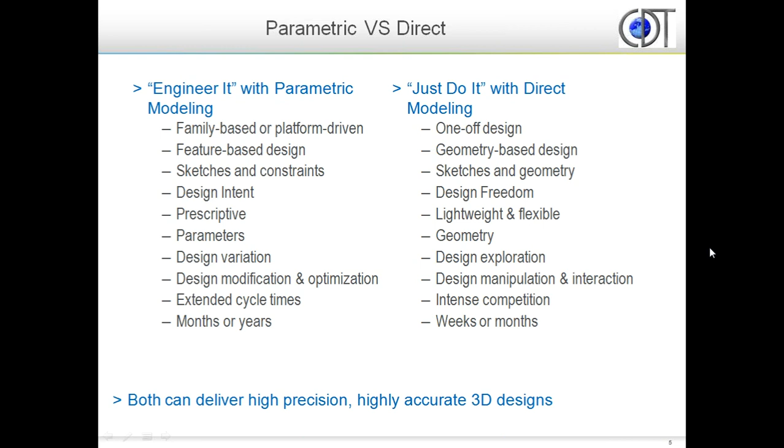Direct modeling process opportunities: even though I can do a lot of the same work I'd do within Pro-E, the idea is I do hardcore engineering work in Pro-E and design work with the Creo Direct application. I can also make late design changes because you're not worried about moving things and what happens down the line - not that you can't make those relationships, but you're usually not as tied into them. This allows on-the-fly design changes, late-stage design changes, and helps with model preparation for FEA work, which you'll see as I get into the demo. There are a lot of different reasons for this, and we'll probably have some Creo Direct demos and webcasts as we go on, but unfortunately we won't get too deep into exactly what the capabilities are today.

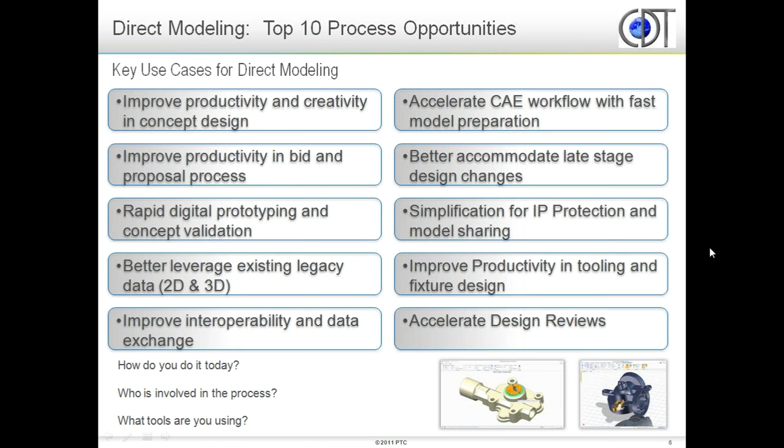Okay, so Creo Flexible Modeling - again, this is a Creo Parametric only app, so if you're using Wildfire 5 and back... and Rosalinda, I forgot, you should have piped up here.

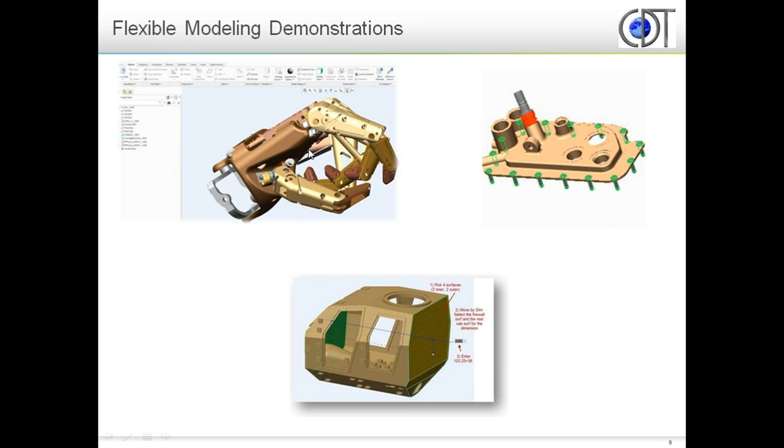Okay, alright, so all I'm going to do here is fire up Creo Parametric. For those of you that have not seen Creo Parametric before, and this is your first introduction to it, you'll have a little crash course into what you are seeing. But essentially, this is the changes that they have made for what would be considered Wildfire, which is now Creo Parametric. You can kind of see this is just the beginning interface as I fire up Creo Parametric.

See what is now called the ribbon interface. Me personally, I think it's kind of nice for those of you that are working on Wildfire 5 and have been introduced to it in the drawing mode.

They have made some changes that allow you to manipulate and create things no matter what tabs you're in, which is nice, and that's kind of a big cheer usually from the Wildfire 5 guys.

But now, here's the new ribbon interface, okay? For those of you that are considering moving up in some form. We all know what happened when we moved from 2001 to the Wildfire series. I will promise you it's not nearly as big a jump as that was.

You can kind of see some of the interface as I open up a part here. This is just a part file that has been opened up. One thing that's nice that they've added into the interface that makes it a little bit easier as far as a transition is this little command right here.

Essentially what they've done, for those of you that haven't seen this before, is they've logically grouped commands into tabs. So you can see all of the geometry and modeling-based functions here in what is called the Model tab. The Analysis tab shows distance and angle measurements. And if we were in assembly, you would see some of the interference checking type functions.

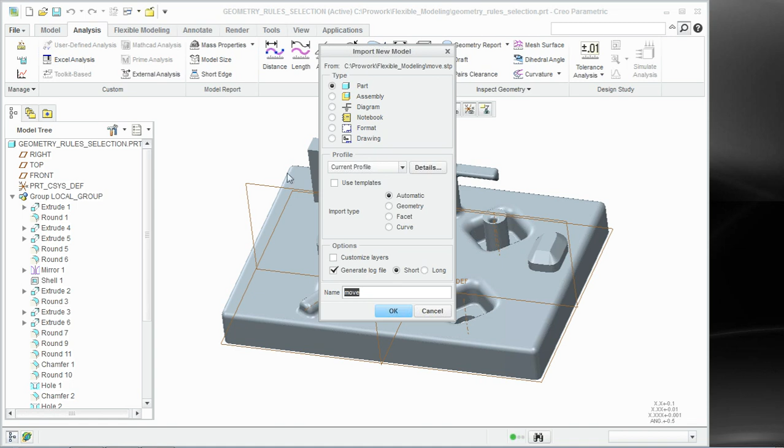Okay, so I'll go ahead and we will also open up this move step file. What you're going to see is we're going to actually open up import geometry. Now it's not the most complicated import geometry that you have, but it is true import geometry. What you will see here is the flexible modeling package is a tab that gets added into the interface of what is Creo Parametric. Okay, and then we'll talk about the capabilities of it.

So what I have here are two different models, and the two different models are this model right here, and then this move model that you see right here. We'll kind of start out with this, the Pro E, which has the history, and then we'll move from there.

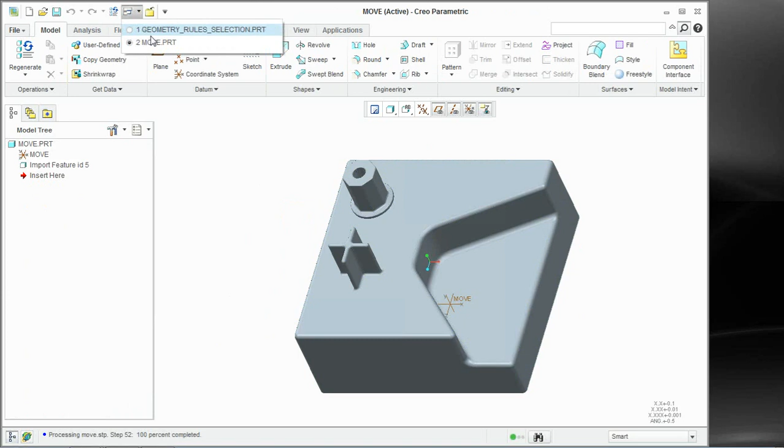One thing I want to talk about here is when you talk about moving geometry in the sense of manipulating, dragging, pushing, and saying I want to move it this far, 5 or 6 inches or whatever it may be, a lot of times what you're dealing with is how do you select that geometry, okay?

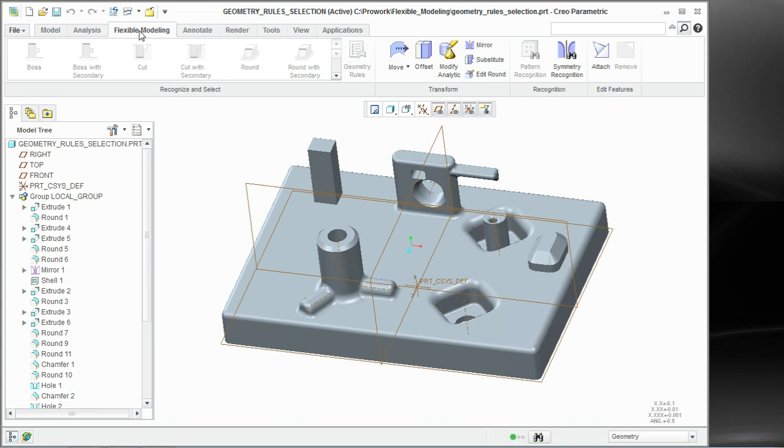So when I pick the flexible modeling tab, you see a number of different commands that it has, and a lot of them are based off of selection. So those of you that have done geometry selection, as far as the surface base, where you use the loop selection technique and the seed and boundary selection technique, the selection techniques in flexible modeling are actually quite intelligent.

So I can pick a surface and say, hey, I want to move this surface, or I can say I want to describe this thing as a boss. And what you'll see is all of the surfaces that are associated with what is considered to be that boss will get selected. Same thing if I pick this surface right here.

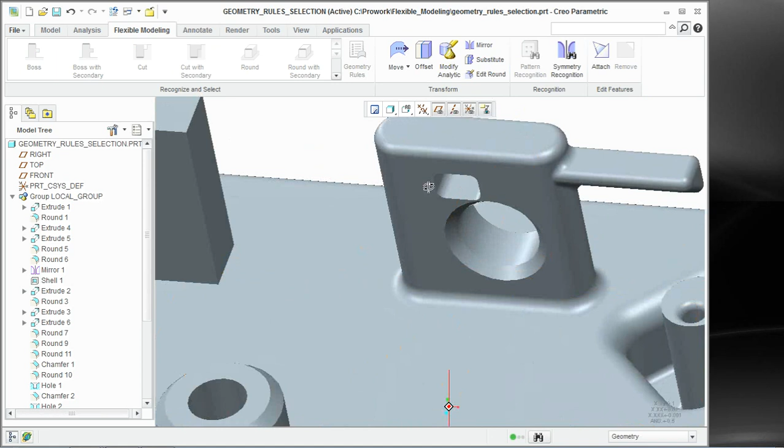If I pick this surface right here, if I say I want the entire boss, notice how some of these other surfaces didn't get selected. But if I say I want this surface and I want boss with all the secondary features or secondary surfaces, it selects the entire thing.

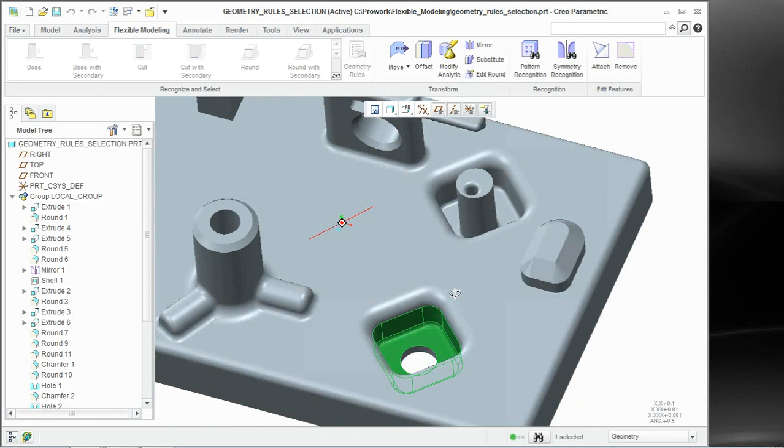And whether it's bosses, what it considers to be bosses, or if I have what it considers to be a cut, I have the ability to select not only those surfaces, but also a number of different surfaces with this secondary concept. So it makes it easy for you when you have the idea that I want to manipulate geometry.

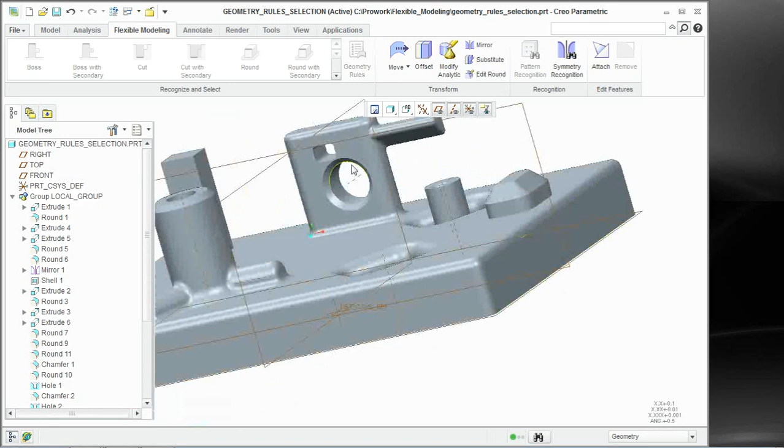Instead of just holding the control button and picking everywhere, or using some of the other techniques that Pro E has, you can use some of the techniques within the flexible modeling package to get the same process done. And it doesn't make a difference whether we're using a Pro E based part or an import geometry based part. I still have the boss with secondary concepts, and again, it makes it easier for me to select and saves me time from using the control button and some of the other functions that I have. Okay, so selection is nice and easy within the software.

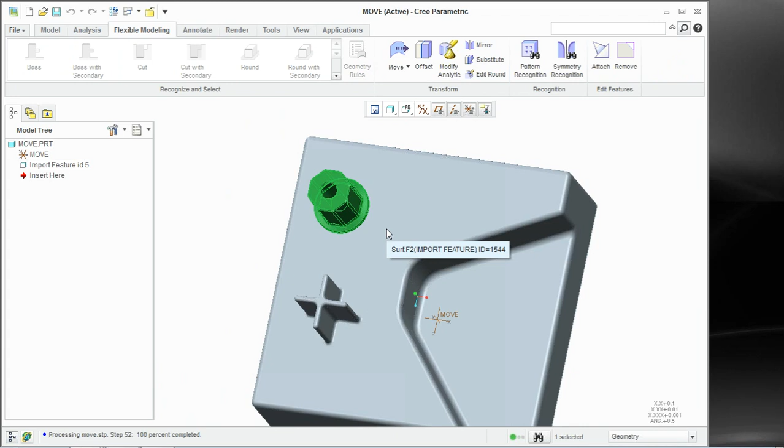All right, manipulating geometry. Again, whether it's on the import idea or whether it is on the Pro E idea, and we'll do it on both, what I have is something called the move command, and the move command is sectioned out into move by dimensions, move by constraints, and move using the dragging technique, and I'll show all of these.

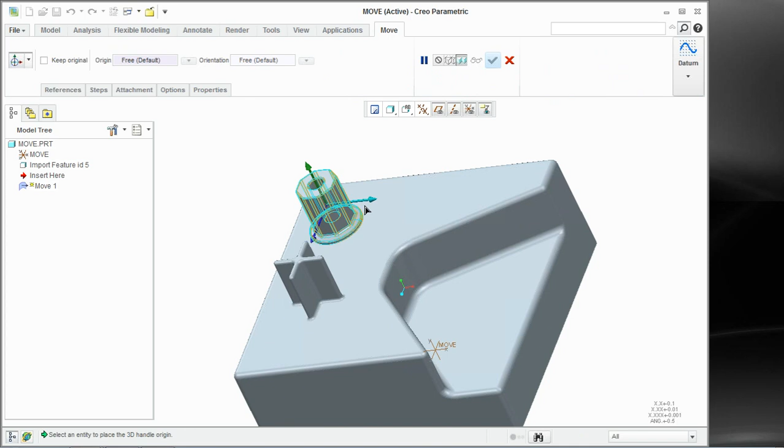But if I say move using the dragging technique, what you'll see is the 3D dragger, which is prominent actually in Creo Parametric in the assembly mode, and what I'm allowed to do is drag geometry, and all I'm doing is dragging it along, essentially, in this case, X, Y, and Z.

So I can drag it up. Notice how when I drag this guy up, the actual geometry manipulates to keep the solid concept and changes itself to adapt to what we're doing. So we'll drag it back down. There it is. Okay, when I'm done, let's go ahead and drag it back up a little bit there.

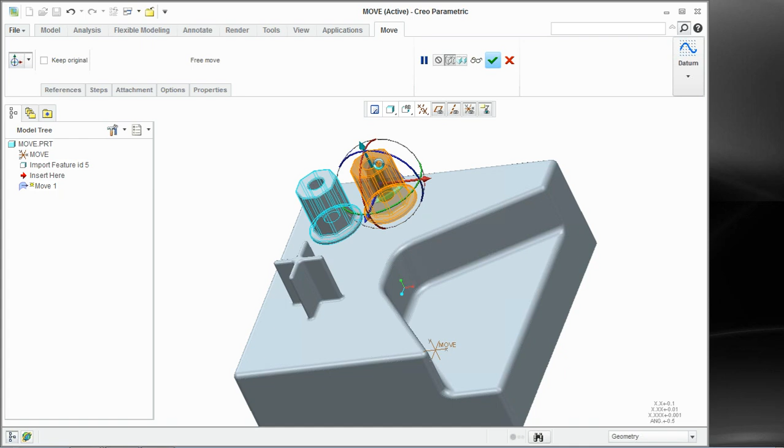When I'm done, I say here's the OK button. And what I've done is actually drag import geometry. Again, manipulating import geometry.

If I come do it here in the Pro E parts, it's the same concept. If I come in and pick this surface and say I want the boss with everything secondary, do a move right here, again, what I'm doing is actually manipulating Pro E data, but in the sense of a geometry manipulation.

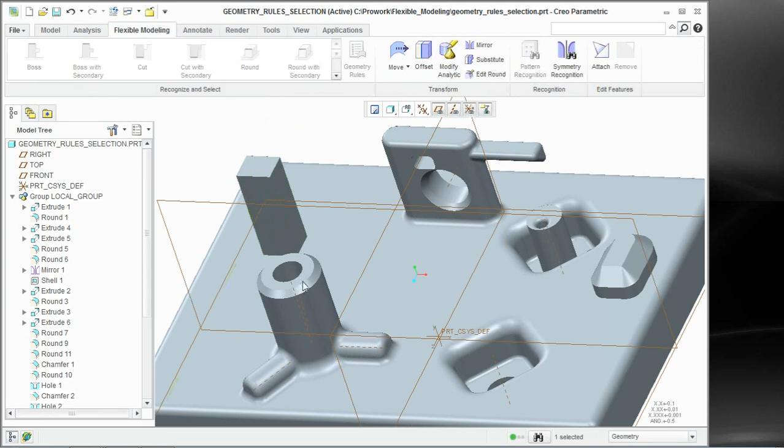So again, the idea here, everyone, is that if I have this set of features right here, and at the last minute my customer comes up and says, hey Ben, we want to move this thing 10 inches one way, but for whatever reason I've built a lot of parametrics and relationships into that, the effects of that could be fairly devastating on my model and the manipulation of my model.

What I can do with the flexible modeling packages is not only do this with import geometry, but I can perform these same functions on Pro E data as well. What you see here at the bottom, if I drag this down, is that they go in as move type features. I can come here and pick this move, and if I delete this move feature, whatever I just did goes away.

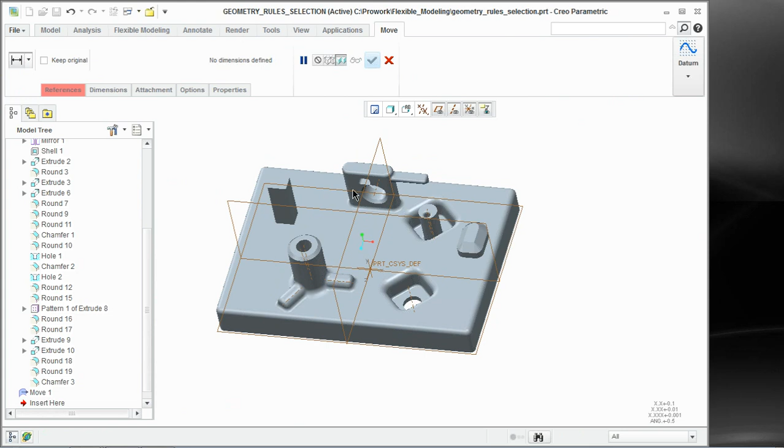So whether I'm doing moves on features like this, or something called move by dimensions, I'll pick this guy right here. Actually, let's select him first. Let's select everything, and say boss with secondary, move by dimension. I'm going to say from here to here is how I want to regulate my dimension.

Instead of me just manually dragging things around and not knowing where the dimensions are going to be, I can say here, that's how I want to regulate, how I'm going to measure it. I want to move it from that, and I want the dimension to be close to 100 or whatever it may be. Now I have a little bit better sense of exactly where that part may be.

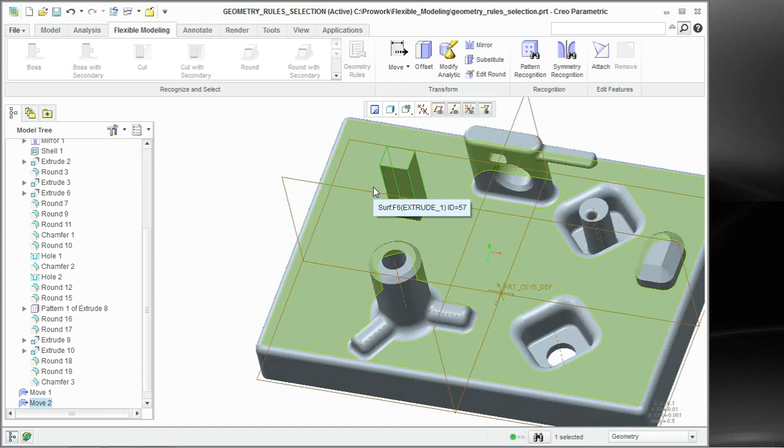So whether I'm moving one direction, you can move a second direction if you want to. You can move in two different directions if you'd like. And something that's kind of nice, and I think it's kind of slick, is the other type of move you have: the move with constraints.

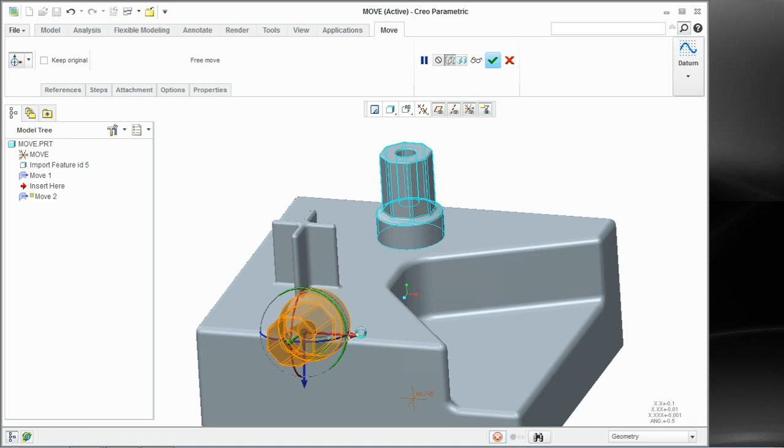Now the idea here, and let's back up so everybody understands what I'm trying to do, is that I can say move with dragger, and I'm going to drag this guy over, somewhere over here, and then kind of turn them around, turn them this way. But really what I have here is no sense of where this thing is at, right?

No idea of where this is at. There's no dimensions that kind of regulate this. Even though I place it now, I can kind of drag it back, but it's kind of off as far as angle-wise. I've manipulated it onto an entirely different surface, but again, there's no real regulation behind it.

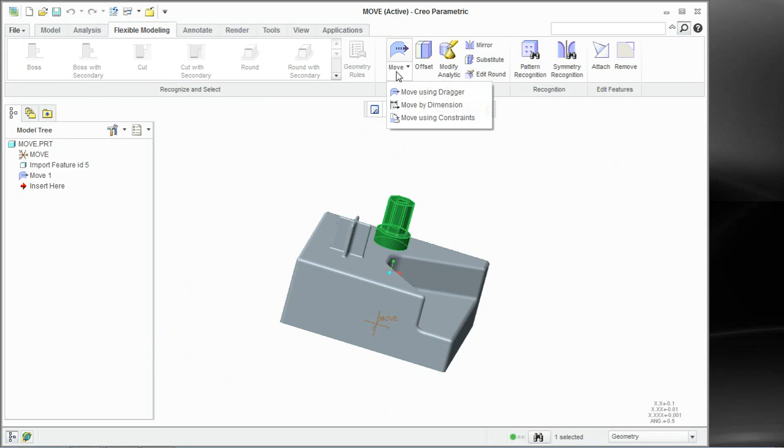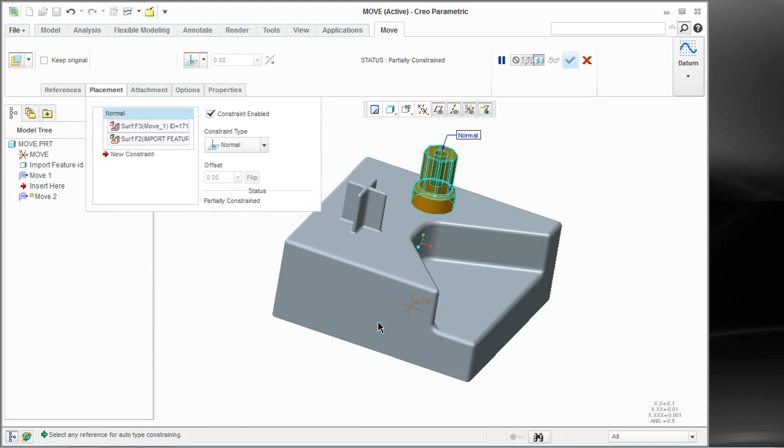What I can do here is actually move this thing by something called constraints, and it sounds fairly familiar to assembly, because that's really what it is. So what I'm going to say here is, there's no flat surface here. I would pick this if this was a flat surface, but I want this - oops, wrong one, not that one - I want this flat surface right here.

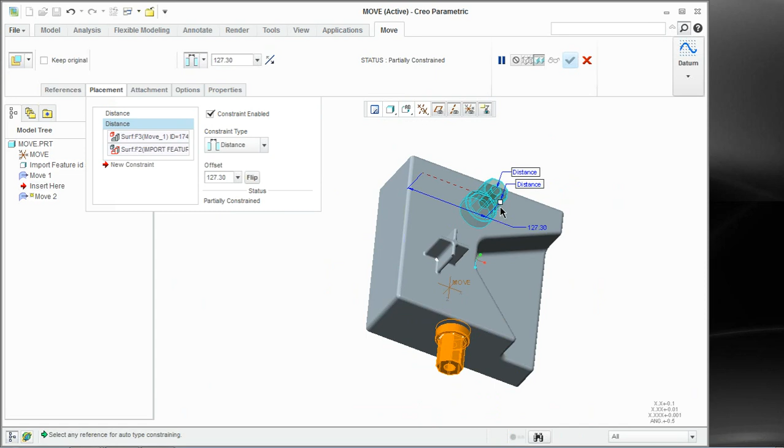And that flat surface right there will make it into a distance. There it is. So from here now, what I can do is regulate distance and how far that guy's sticking out. I'll say I now want to regulate it from that surface to that surface right there. I can now regulate it this way and kind of drag it back and forth, and you can see how we're measuring this way.

And in the last one, I want to measure from here, and I want that measurement to be based off of the bottom. There it is, and I want it to be a distance measurement, and now I can also regulate it off the bottom. So again, now what I'm doing is manipulating it as a distance like that, a distance right here, in and out this way, and then also a distance right there.

So again, even though we are dragging and manipulating geometry, whether it's in the Pro E sense or in the sense of IGES data, I can regulate placement of where that object may be at. And again, I'm not really worried about what the parametrics are at any given time.

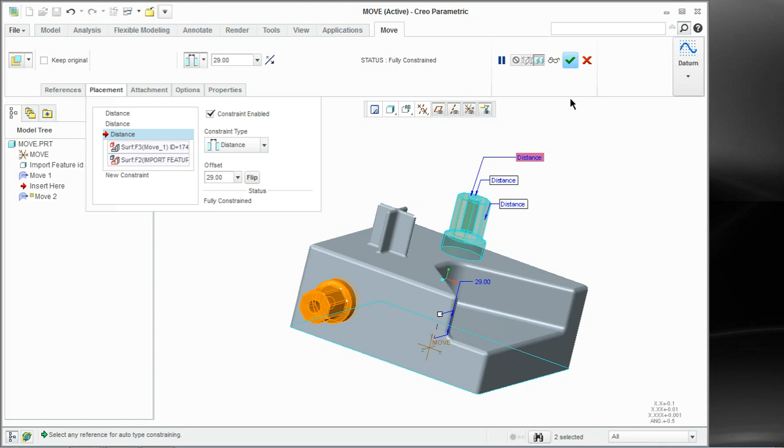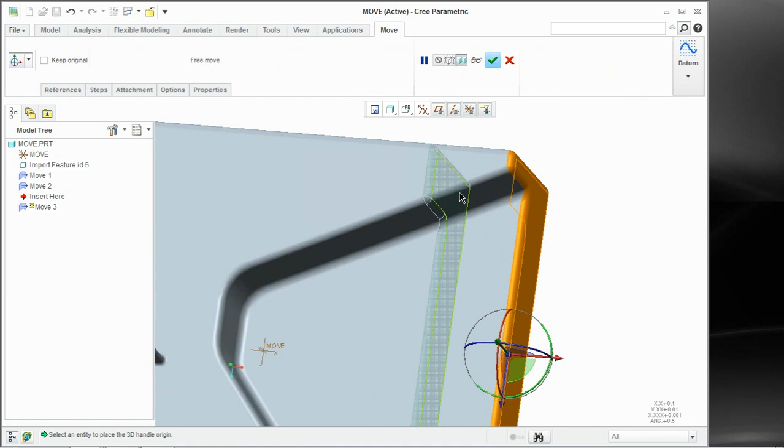All right, some other things that you can do, whether it's features or actual walls. I can come in and say here's the surface that I want to move. I drag it out, and notice how the geometry manipulates accordingly, right? It's not just dragging out straight from here, it actually manipulates accordingly. It's very nice. You can see that type of move right here. Leave that guy right there.

I can come back into the geometry selections. Notice how I can come in and pick this wall right here. If I do a direct move with the dragger, notice how I actually expand that thickness. Well, that's not really what we want.

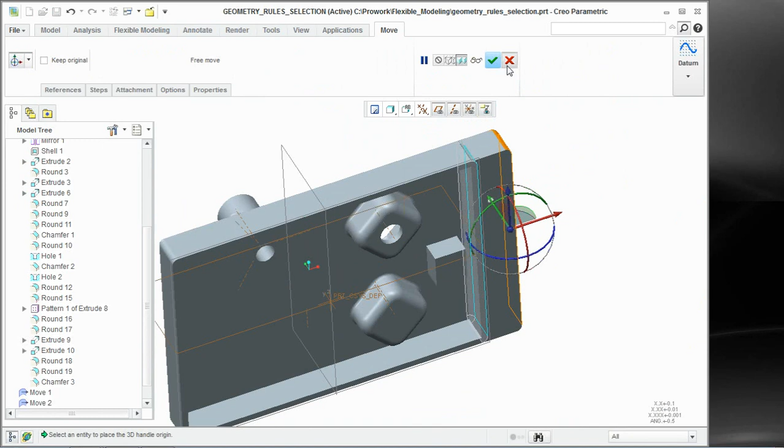We actually want to move the entire wall. I can select that wall and that wall also, and then do a move from that point. Notice how I can say, actually, I want the 3D dragger to move along that edge. I move the wall out now, and I've actually manipulated where that wall is by moving those. Again, I could select all of these features right along with it and move those features right along with it if I wanted to. Let's do an undo and see that move that real quick.

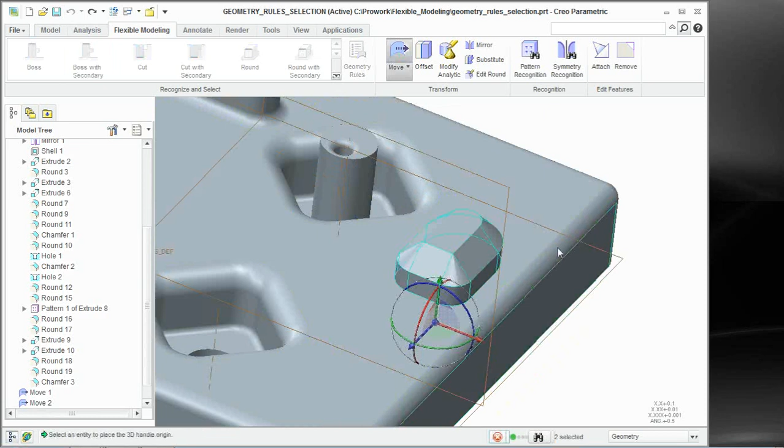There's that surface. Let me go ahead and hold the control button and say boss with secondary. Do a move, move the 3D dragger right there. Notice how everything stays right in relationship to that wall manipulation also.

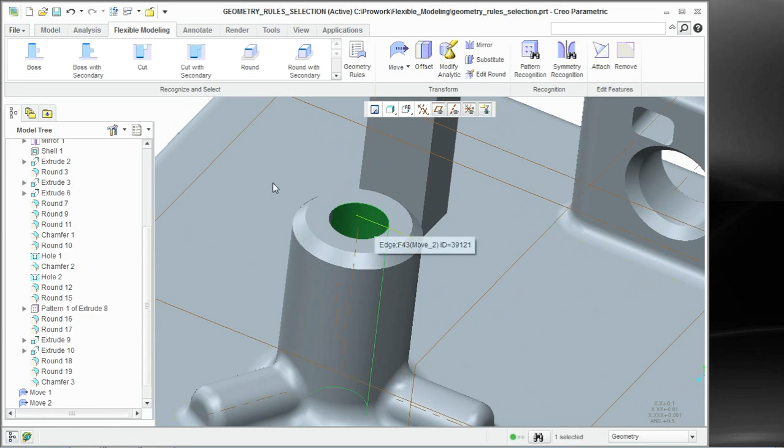Okay, and again, whether it's cuts that I'm moving, whether it's walls that I'm moving, still have all those same capabilities. Come in here and pick the hole that I have, or essentially the cut in this manner. I can do a direct move if I wanted to. I also can say offset, and I can manipulate the size of this hole.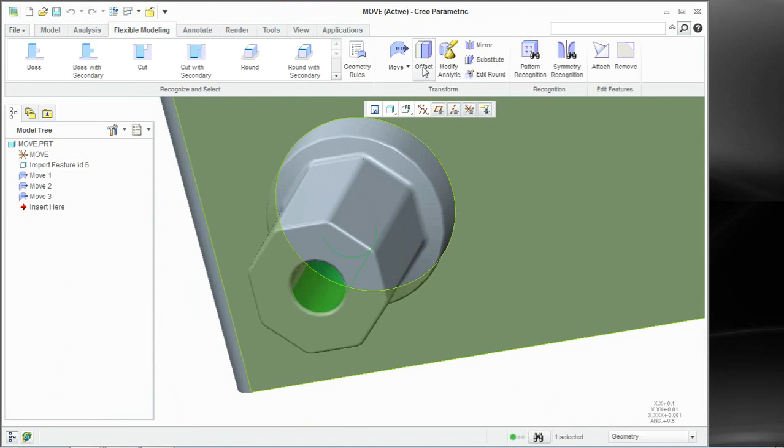Okay, manipulating the size of the hole. We want that hole to be that size. Again, I'm manipulating direct ProE geometry, or if I come back into the move part, manipulating import geometry, notice how the rounds adapt right along with it. Okay, the rounds adapt right along with it. And again, I've made a quick change in IGES data if a customer would ask me to.

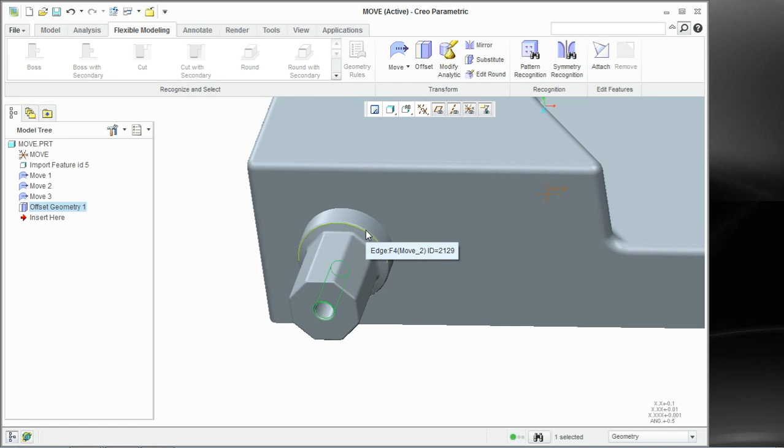So there are a lot of the move type functions that are in the software, a lot of different variations that you have the ability to do with it. Some of the other things that you can do here, and we'll go through some of these other guys.

One of them is the edit of rounds. It will recognize, again, we are on the import data. Notice how I can select a round and say, hey, I just want this round. Or if I say I want this round and I want round with secondary, I can do an edit round. Notice how I can manipulate all of those rounds at once. And then, again, what are we manipulating? We're actually manipulating import geometry.

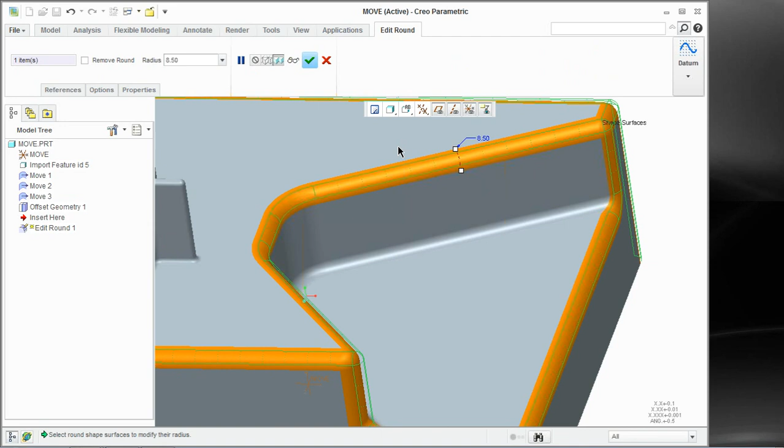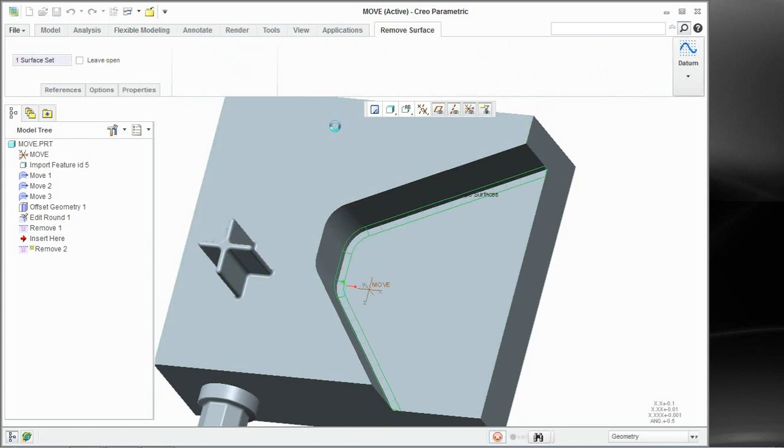I also have the ability to take these rounds and then do a remove command. So again, if you're doing FEA work on import type geometry, it's a good way to modify that geometry. Again, I can pick these guys, round secondary, and do a remove also, taking out all the rounds on import data, and this is very similar to the remove tool that you see within ProE. So again, whether it's here or whether it's on the geometry tools, doesn't make a difference, still do the exact same type of function.

There it is, round with secondary, and then I can edit the round if I want to. Again, editing the round of ProE data, and what do you see here at the bottom of the model tree? An edit of the round.

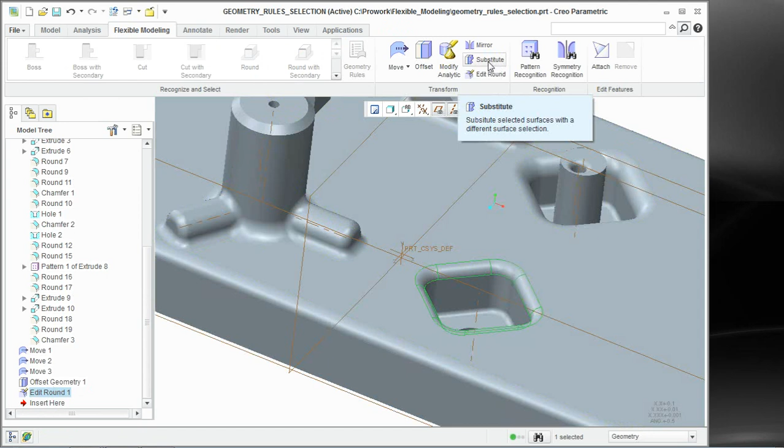All right, so the remove command, the edit round command, there's one more thing that I'd like to show you, the substitute. I'll open up a little different file for that. Here's my substitute function. For those of you that have ever used the offset and replace command in the surfacing tool, this is kind of an extension of that. This is actually a little bit slicker than what that one is.

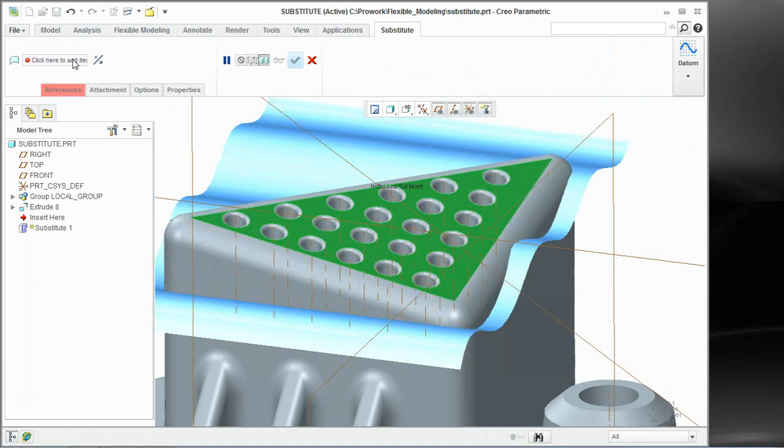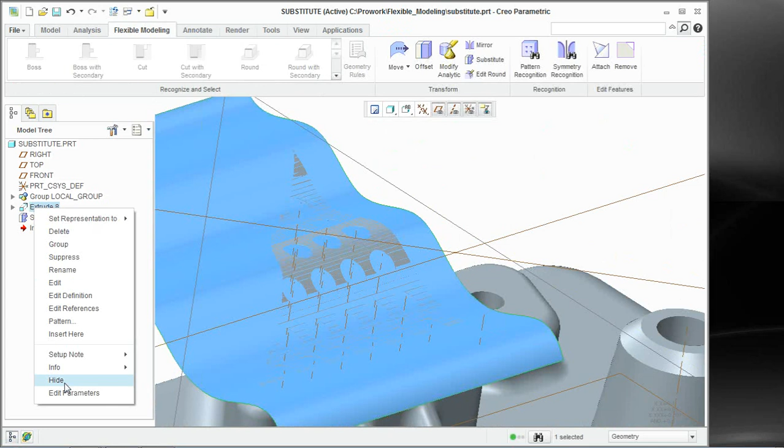But what I can do is say substitute, and I want to substitute that surface, and what I want to substitute it with is that surface. And what's really nice about this is the ability for the software to keep the rounds, and not only the rounds, but also the holes and the geometry that was associated with those holes, or in a sense, the rounds that are on those holes. So if you wanted to create another wavy type surface just to see what it would look like, or do a quick prototype, again, this is ProE geometry that I'm manipulating and doing a substitute with.

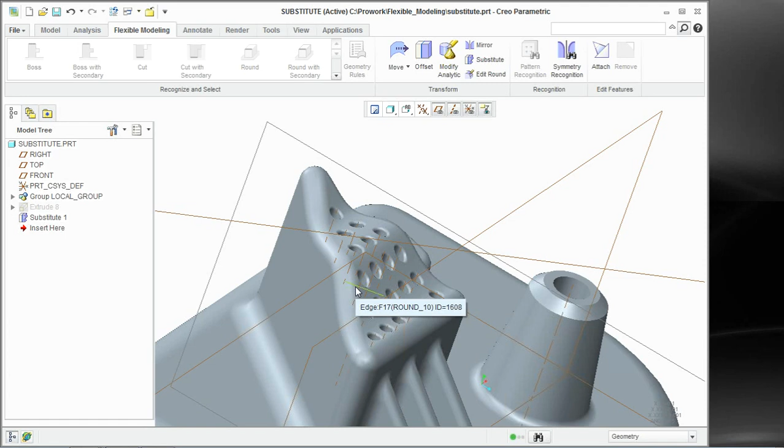That replace command is within the Pro E interface if you've never used it, but this one's a little nicer and it does more work for you, where I wouldn't have to recreate all the rounds on the holes. All of this work has been done for you, and I've replaced that surface right here with this surface as soon as it regenerates with that object. Kind of a nice feature that we have with that.

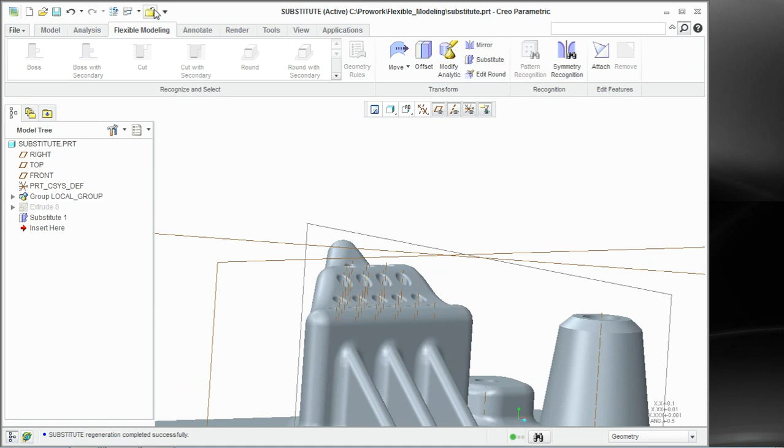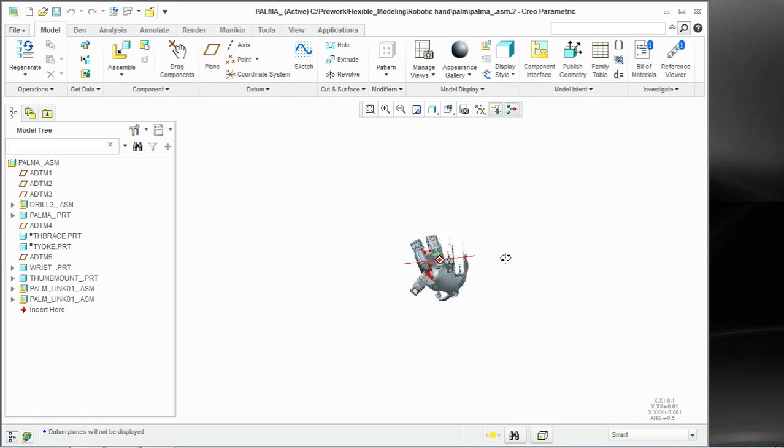Last thing I wanted to show you, again a very simple interface with very simple commands, is this. Let's close a few of these down and open up this little robotic hand that I have. Just turn off the bird's nests. There we are. I'm going to open up this little finger that we have.

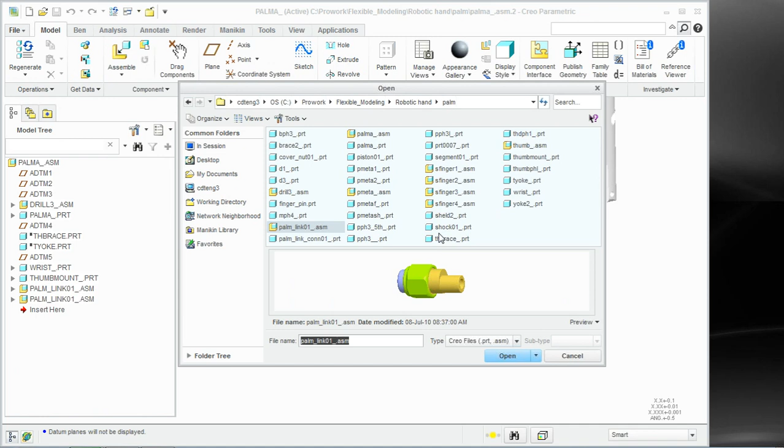Notice how this is a Pro E part that I have right here. Let's go back to the assembly, and what I'm going to do is assemble a little pin into that finger hole that we have. As soon as I find it here, there it is, finger pin. Let's drag it into an area right about there.

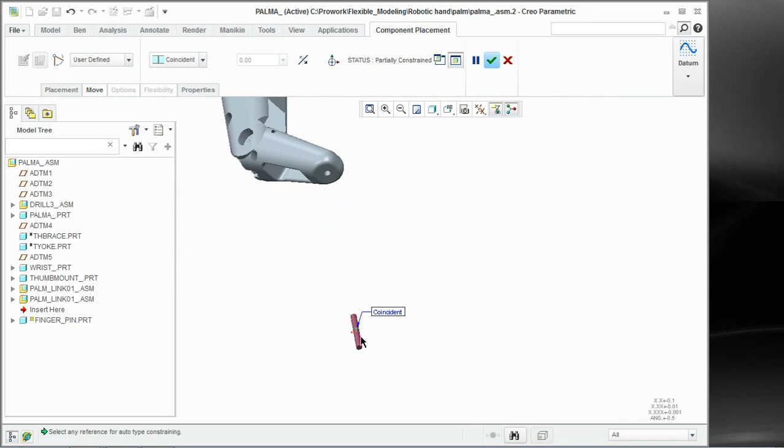Let's turn the 3D dragger off, and I'm going to place it in this hole. Notice how all we did was just put a pin in the little finger hole.

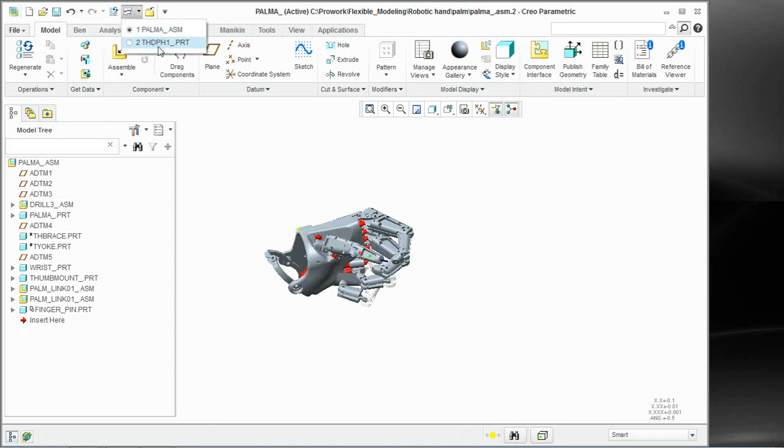But what I'm going to do is come back to that specific part, and in the flexible modeling function, go ahead and pick that hole and do a move for it. We'll do it with the dragger, and what I'm going to do here is just drag that hole that way. There it is—notice it's a little offset, and all it does is put a feature in the model tree. That is the move command.

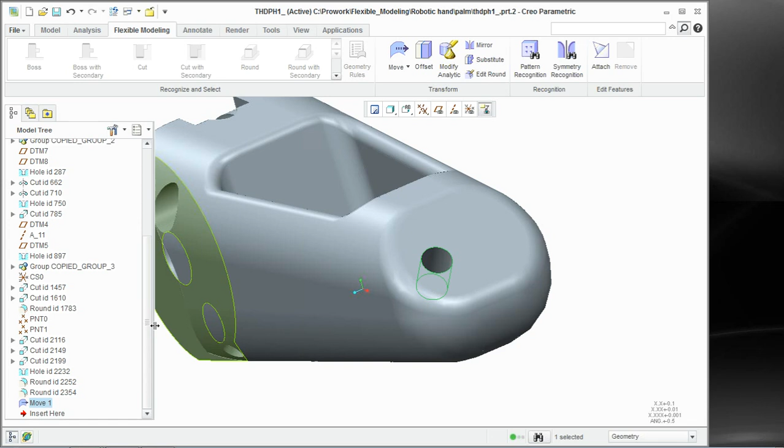If I come back into my assembly, there it is. Now if I do a Control G and a regenerate, notice how it does keep the parametrics of where that placement is for that pin. So again, what I can do is manipulate Pro E geometry without all the implications of the parameters or relationships I've built, but still keep, in a sense, some of those relationships—whether it's part mode or assembly mode—so I still get the results I want for the manipulation of that geometry.

So for the time constraint, that's a brief overview of what the flexible modeling capabilities are for Creo Parametric, and obviously flexible modeling.

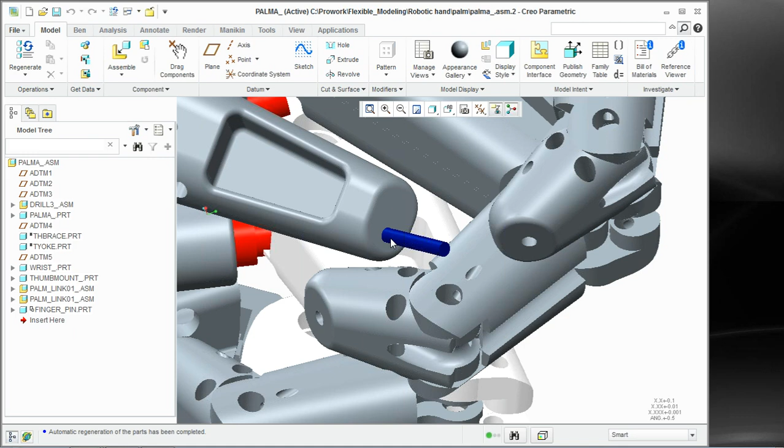What I'm going to do here is throw back open our PowerPoint and talk a little bit about what it is. Essentially, you can get the flexible modeling extension for about $1,500. It is a floating module, just like all of the other Pro E modules are—you can float it from one seat to the next. It's free maintenance for the first year, so you don't pay maintenance for that. So essentially, Rosalinda, correct me if I'm wrong, that all it would be is the first year would be $1,500 out of pocket, and that is the offer they have right now.

You're correct, Ben. I'll leave this open right here. What'd you say? I said you would be correct. It's $1,500, yes.